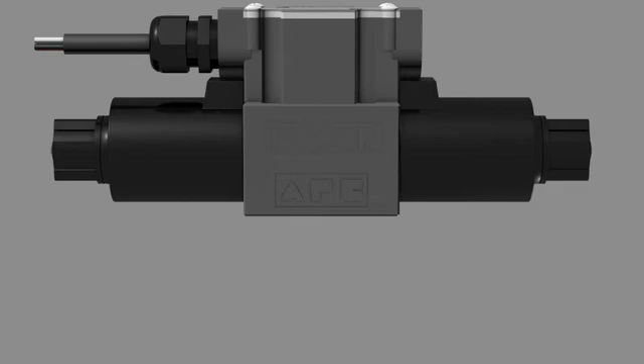In this video, we will look at the basic operation and flow paths of Hivair's 4-way, 2 and 3 position D03 and D05 size solenoid-operated directional control valves. Note that the D03 size valve combines flow from the tank channels on either end of the valve to one single tank outlet. But to better understand the valve, we will show it has two separate outlets like the D05.

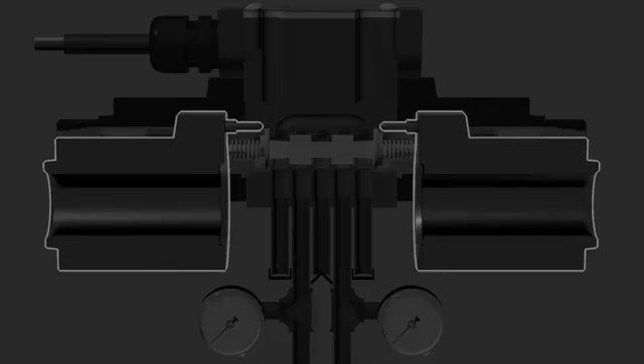The tank channels are connected using a twin-channel design with an upper and lower channel, greatly reducing pressure drop. Let's look at the basic components and function of the solenoid-operated directional control valve. There is a coil, core tube with a plunger, and a centering spring located on each side of the directional valve. Each core tube has a core immersed in oil that moves the plunger to shift the spool.

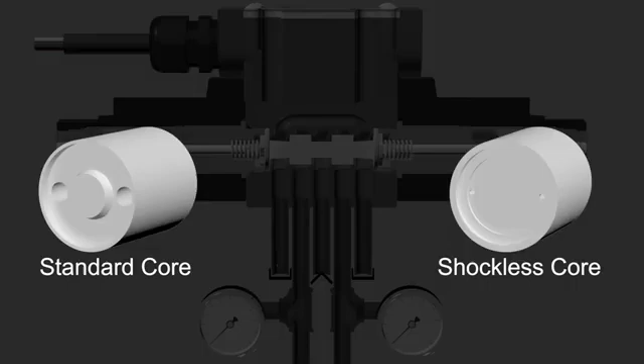On the standard valves, you can see the two large holes that allow the core to move through the oil-filled tube. Hivair offers a hydraulic shockless valve where the core is equipped with orifices to meter the flow and reduce the speed of the core by up to 4 times, thereby reducing shock, pressure spikes, and providing an even quieter operation. The standard valve will shift in approximately 20 milliseconds and the shockless valve will shift in approximately 80 milliseconds.

Each core tube has a brass pin located at each end of the valve to function it manually. Using an Allen key or a cylindrical item smaller than 1/4 inch in diameter, press the override pin to manually shift the valve. Pressure created by the tank flow and centering spring will be working against the pin, so ensure enough force is applied to fully shift the spool.

To wire the valve, you will need to provide power to the solenoids using a 3 or 4 conductor cable. For this example, we are showing the wiring setup for a 3-position double solenoid valve. There are the 2 hot wires shown in red and black connected to solenoid A and solenoid B, usually coming from a switch. The common wire shown in white is connected to the jumped contacts. And last, we have the ground wire shown in green.

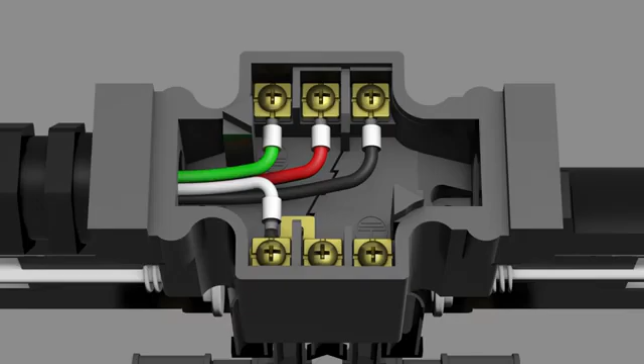When power is applied to a coil, its plunger pushes the spool to the shifted position, thus changing the flow path of the valve. To prevent damage to the valve, always ensure only one coil is energized at a time. Once the coil is de-energized, you can see the spring returns the spool to the de-energized neutral position. The lines with gauges labeled A and B are the work ports typically connected to a hydraulic cylinder or motor.

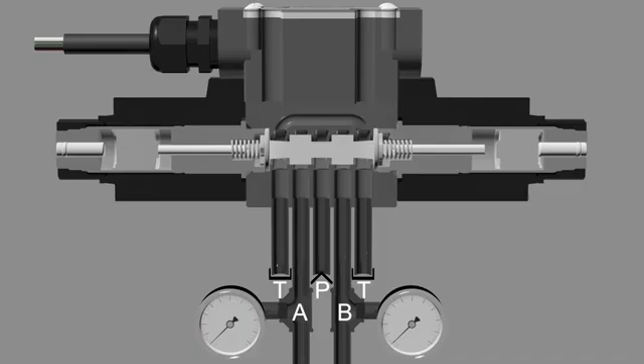We will look at the main stocked spool types, but note there are several more flow path options available on Hivair's website. The first spool we will look at will be the H spool, or all ports common spool. When the valve is in the de-energized or neutral position, we can see that the P port is open to all ports and will flow to the path of least resistance, usually tank. The tank channels are connected using a twin-channel design with an upper and lower channel, greatly reducing pressure drop.

When we energize the coil on the left side of the valve, solenoid B, the plunger pushes the spool to the shifted position, and now we see flow from the pump being directed from the P port to the B work port, with the A work port now open to the tank T port. When we energize the solenoid coil on the right side of the valve, solenoid A, we get the opposite operation, with flow from the pump being directed to the A work port and from the system to work port B and back to tank.

The B spool, or all ports blocked spool, stops all flow in the neutral or de-energized position. You can see the spool covers and blocks all of the ports, not allowing flow through the valve. When energized, the valve performs in the same manner as the H spool, opening up flow from P to B and P to A.

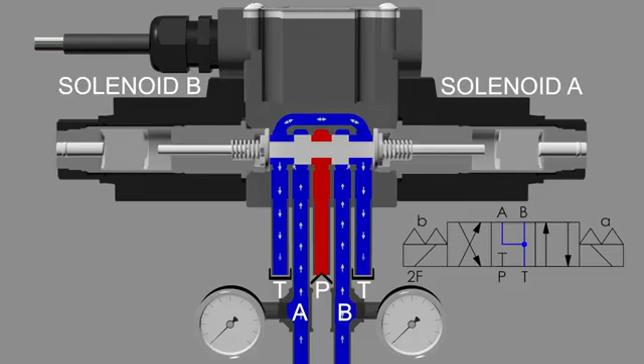The F spool, or motor spool, blocks the P port but allows flow from A and B to tank in the de-energized position. You can see the P port is blocked with the spool, but A and B are open to tank. When energized, the valve performs in the same manner as the H and B spools, opening up flow from P to B and P to A.

The T spool is the opposite of the F spool, and in neutral, the P port is open to A and B, and the T port is blocked. When energized, the valve performs like the previous valves, opening up flow from P to B and P to A.

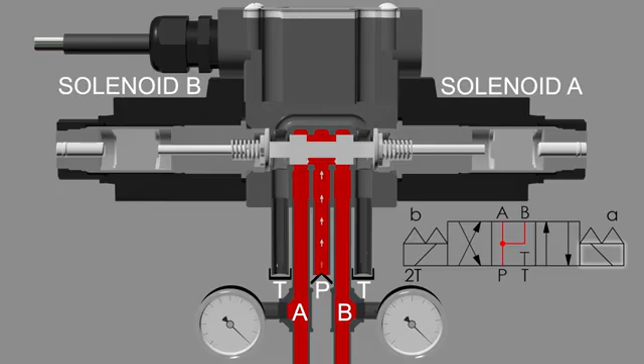The K spool blocks incoming flow from the pump while also blocking the work port B, while work port A is open to tank. When energized, the valve performs in the same manner as the other spools, opening up flow from P to B and P to A.

The C spool, or tandem center spool, is the only spool that is machined to allow flow through the center of the spool through small radial holes. For this reason, flow is reversed when the same coil is energized on the aforementioned valves. To overcome this, the coil is simply renamed, as you can see by the symbols shown.

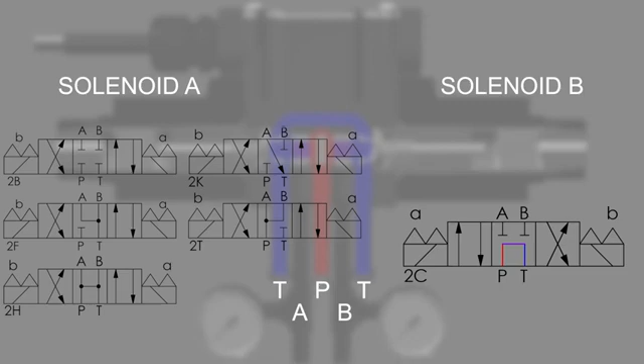You can see the coil on the left is now the A solenoid and the coil on the right is the B solenoid. When the valve is in the neutral position, we see flow being directed to the P port and through the tandem spool to the tank. In this position, the work ports A and B are being blocked by the spool.

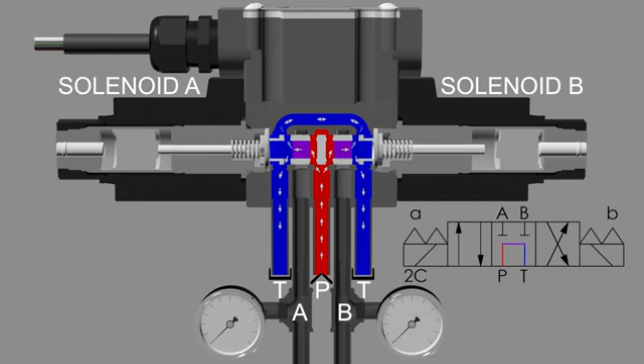When we energize the coil on the left side of the valve, solenoid A, we see flow going from the P port to the A work port, and the B work port is open to the tank. When we energize the solenoid coil on the right side of the valve, solenoid B, we get the opposite operation, with flow from the pump being directed through the spool to the B work port, and from the system to work port A, and through the spool and back to tank.

Now let's look at the single solenoid two-position valves. The first spools we will look at will be the 1A and 1AY spools, or spring offset, closed or open in transition. In the de-energized state, the spool is in a spring offset position with P flowing to A and B open to tank. When energized, the spool will shift to the other flow condition where P is now flowing to B and A is open to tank.

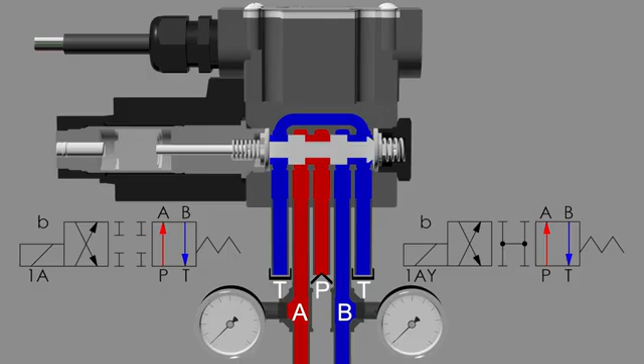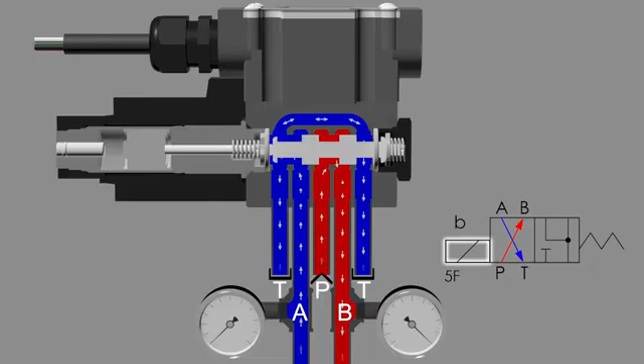Now we will look at the single solenoid, two-position, spring-centered valves. In the de-energized state, the spool is in the spring-centered position, showing the 5F spool for reference. When energized, the spool will shift to the other flow condition, where P flows to B and A is open to tank. Unlike the 1A or 1AY, there is no transition or crossover condition, since the spool never moves past center. Note, this valve is available in all of the standard three-position flow conditions.

All of the two-position valves can have the code R added to the spool code to provide the opposite flow condition from standard. For example, the 5BR spool code will still be the B pattern in neutral, but since the coil is now on the right side, when energized, the flow condition will be P flowing to A and B open to tank.